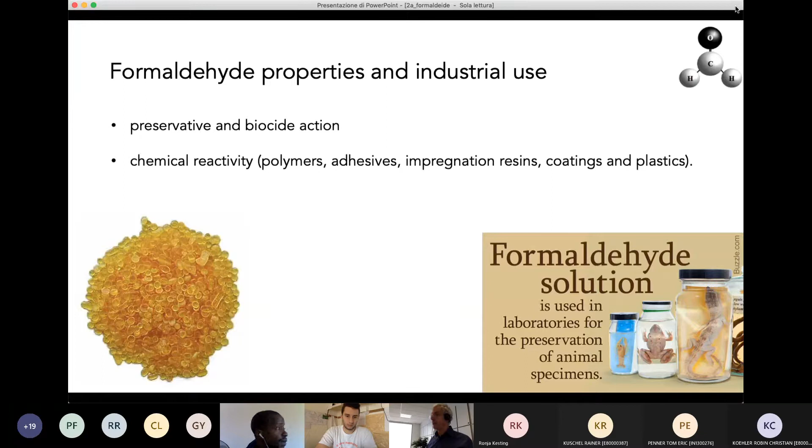We have learned what this substance is. It is a gas, very reactive, with very good biocide properties. So in many industrial sectors it is used, or it's better to say it was used a lot in the past because of its preservative and biocide function. And it was used, and is still used today, in the preparation of many chemicals, many polymers in particular, because, as we said, it's a reactive molecule.

So chemists like me like this substance because we can build more complex molecules starting from this little formaldehyde molecule. So these are the sectors where this substance is used: medicines, adhesives, preservatives, explosives, dyes, and many others.

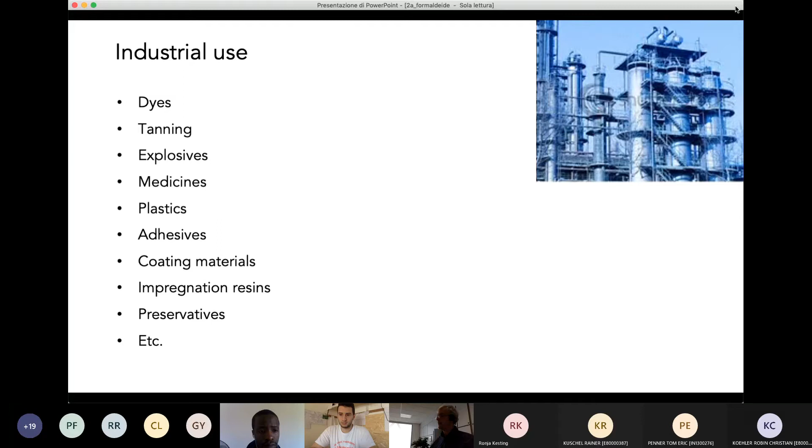We have understood also that formaldehyde is present more or less everywhere in the air we breathe, and we have also considered that this substance is really present in very small concentration in the air, but we breathe a lot of air during our daily life, and so also a little concentration, but continuously introduced in our body, can produce some disease, some problems, some health effects on our organism.

So the fact, the evidence, that formaldehyde is toxic, is irritant, but moreover is carcinogenic for sure, is clearly evidence that the emission, the presence of formaldehyde in our houses, in the environment where we live, is a serious problem for all of us.

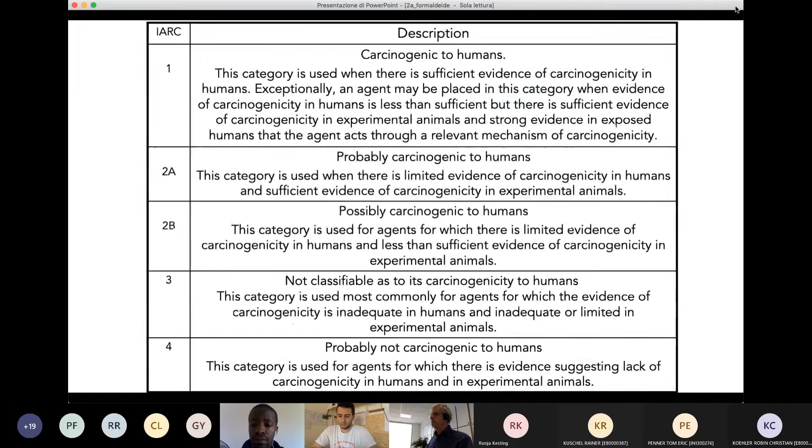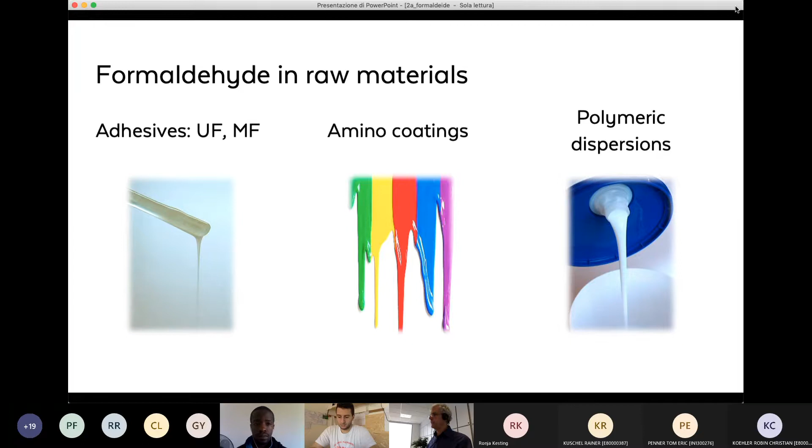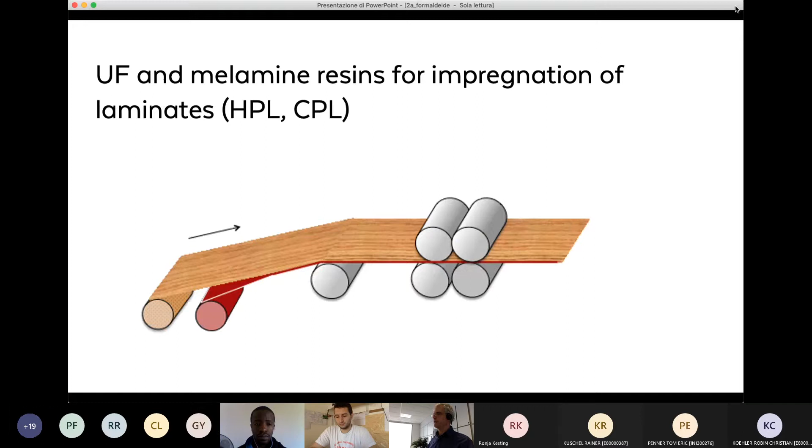We know now that formaldehyde is used also in the furniture sector for the production of different types of products: adhesives, coatings, polymer dispersions, as impregnation in the production of impregnated papers, of laminates. But the most important sector where formaldehyde is used is that of the production of wood-based panels.

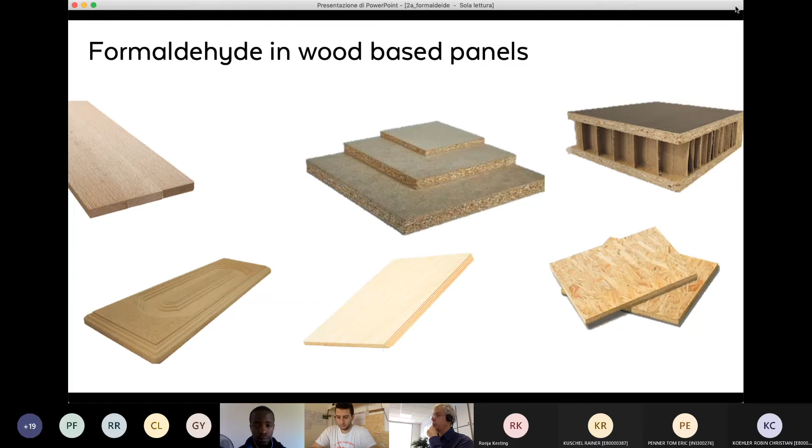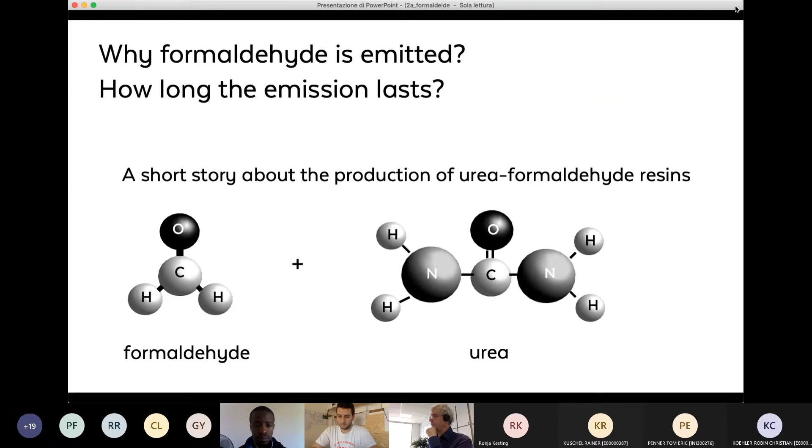All panels we have already analyzed are based on wood, of course, in different forms, and a binder, which is normally a urea formaldehyde resin. We know now that urea formaldehyde resins are produced starting from two substances, formaldehyde and urea. They are mixed together with some catalyst, with the contribution of temperature and pressure.

And the result of the reaction is the polymerization of these two substances. So they produce a polymer that is used for the production of wood-based panels.

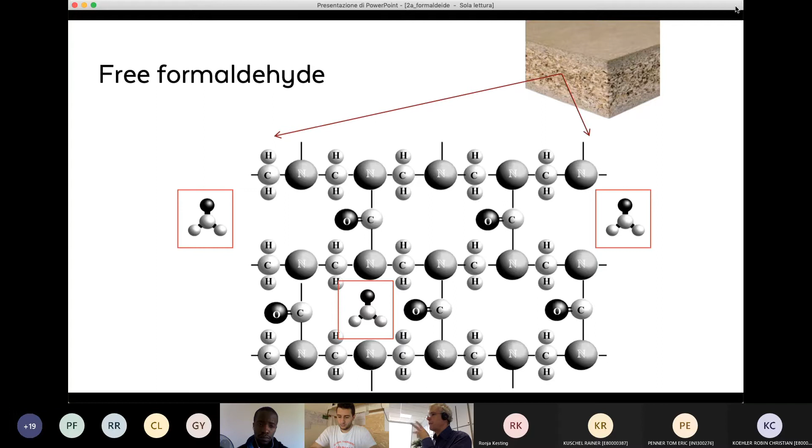There are two problems we said related with formaldehyde. The first is that not all the formaldehyde which was inserted inside the reactor reacts with urea. So some formaldehyde molecules remain as free molecules inside the resin.

But the most serious problem is the hydrolysis of the resin. This means the rupture, the breakage of the resin molecule induced by water, and water we know is present in the air of our houses. So these water molecules can react with the resin which is present inside the panel, producing this cut of the chain, and the byproduct is formaldehyde.

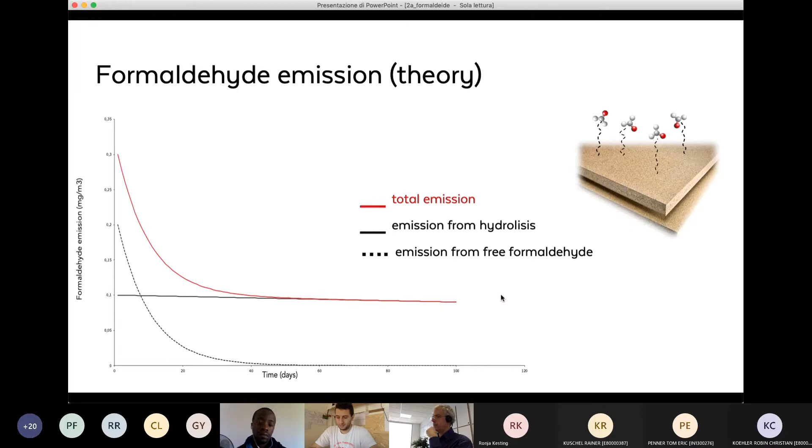But the hydrolysis, we said, continues for all the life of the panel, with a little decay over time. But this curve tells us that the formaldehyde emission is a never-ending story. It's continuous for all the life of the panel and of the derived product like furniture.

This is a typical example of an analysis carried out for this formaldehyde emission. You see here that after around 400 days, the emission is more or less constant.

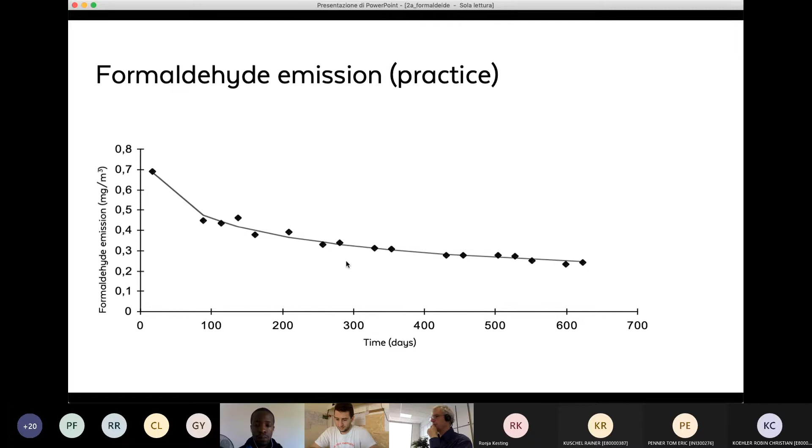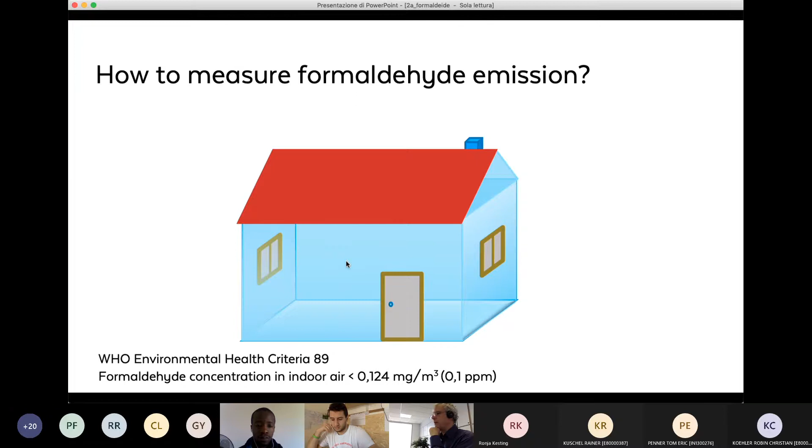How can formaldehyde be measured? We started — when I say we, it means the international organizations which deal with such subjects — we have considered the limit suggested by the World Health Organization in 1989, and we have decided to measure formaldehyde emission by producing a little house in our laboratory.

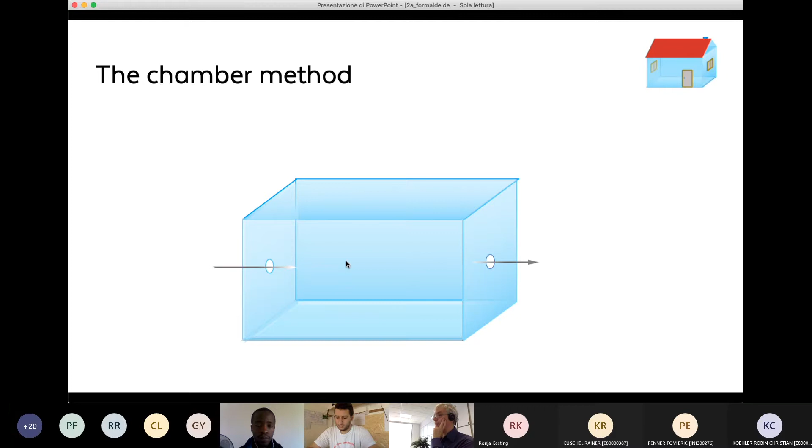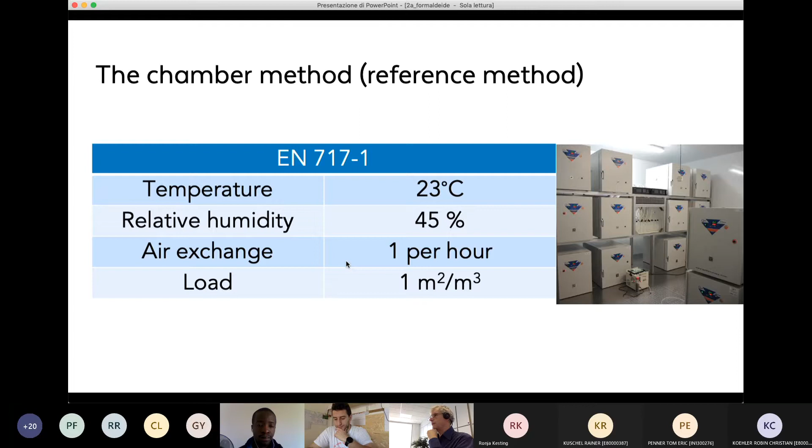So we have in our laboratories such chambers which reproduce the conditions of a real house, with certain temperature, certain relative humidity, with a certain air exchange, and with a certain load, which more or less reproduces what we normally have inside our houses. So what we measure here inside the chambers is more or less the same value that we can measure inside our houses.

I've added that there are also other test methods which are quick and cheap, because especially the furniture manufacturers or the wood-based panel manufacturers need fast and cheap methods to control their production.

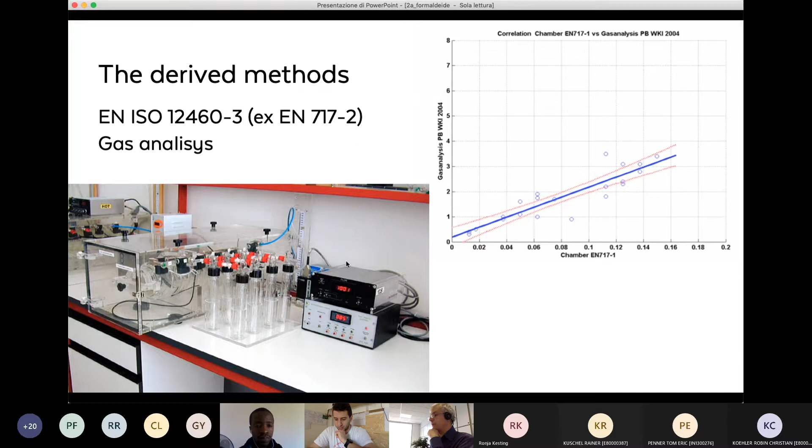Today, if you visit the producers of wood-based panels, if you can visit a plant, there is in all cases a laboratory like this, where they test continuously the formaldehyde emission of their products. Very often the laboratory is working 24 hours per day, because they need continuously to check their production.

So this is to check and to adjust, because they carry out the test, and according to the results, sometimes they have to change the parameters of the production in order to reduce the emission. So formaldehyde control is something which is carried out continuously in all factories producing wood-based panels.

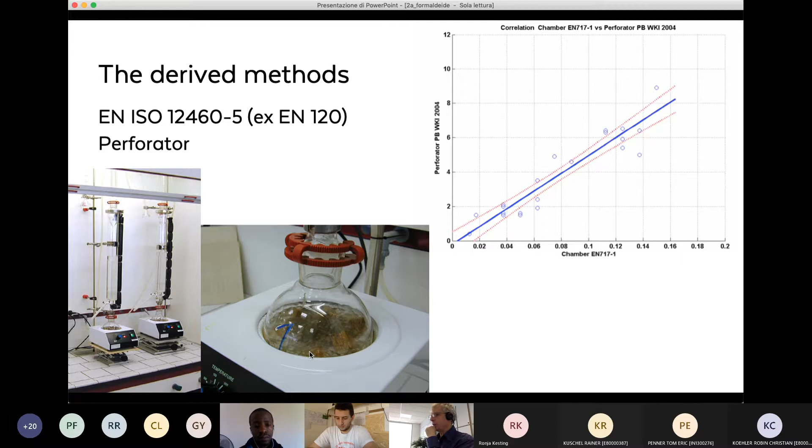Which are the limits? As I said, the limit for the chamber is the same limit that was established, that was suggested by the World Health Organization. So it's 0.124 milligram per cubic meter of air. And in Europe, such panels are called E1.

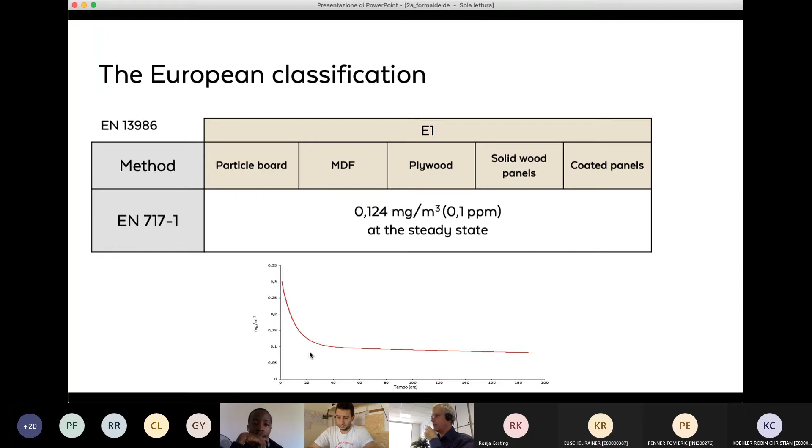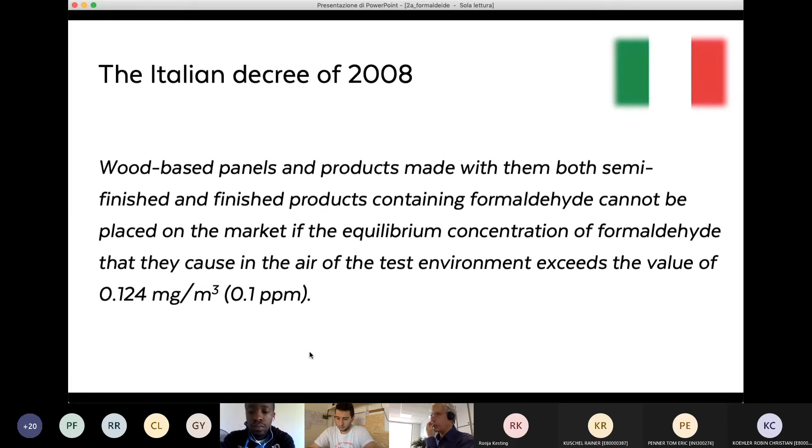There is a standard which defines whatever I already said, but what is important is that in many countries in Europe, this class is mandatory by law. For example, in Italy, but there are other countries: Denmark, Sweden, Norway, Austria, Croatia. There are many countries where this limit, this E1 class, is established by law. In Italy, this decree has been in force since 2008.

I've mentioned that last year there was important news from Germany. In practice, they have reduced the limit by 50%. In practice, the limit is the same in their new law, but the results of the test must be multiplied by a factor of 2. So it's like saying that the limit is exactly half of what it was before.

This change, this variation of the German law, is a consequence of some studies carried out by the experts of this country, who considered that today our houses are smaller. The air exchange is reduced because of energy saving. And so the values defined 30 years ago for the chamber method, they said, are not valid today.

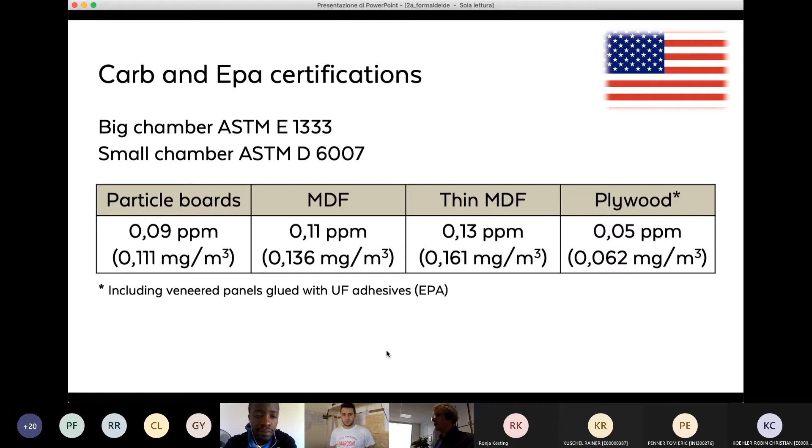This complicates the analysis even more, because you have to use a different method than the European one, and also the limits depend on the type of panel you are analyzing.

The American scheme for the analysis of formaldehyde in wood-based panels is really strict, because all panel manufacturers that export their products to the United States must be controlled by a third-party certifier — meaning an external body — with audits to be done every three months. So it's a really strict system. We at CATAS are authorized by CARB and EPA to carry out such controls, and my colleagues are continuously involved in this activity, because as it's written here, every three months you have to go to the factory.

You have to check the process, if something has changed. You have to sample some panels and test them inside the lab. So also in terms of cost, the certification according to the American scheme costs around, I could say, 10,000 euros for one production every year. So it's a real problem for this sector.

And today this American scheme, because as I said it's the most strict, it is the scheme adopted by IKEA. I've mentioned, I think, many times this Swedish company — it's, I think, the leading company in furniture production in all countries of the world, apart from China. And so what IKEA decides has an immediate effect on all the furniture sector in every country. So today all the panels used for the production of IKEA furniture must be certified according to the American scheme.

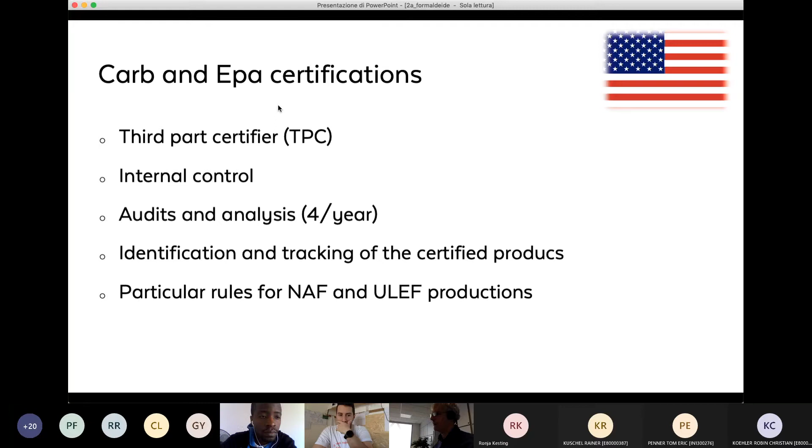And so you can imagine how dramatic this is in terms of activity for the wood-based panel producers, for the furniture manufacturers, and also for laboratories like us. There is a lot of work to do continuously, and a lot of visits inside the companies. So it's really a system that is having a strong impact in the furniture sector, and the reason is the one I've already mentioned: it is the scheme defined by the United States, but also the scheme adopted by IKEA, and IKEA today is a leading company of our sector. What they decide has a strong impact in all countries, in all furniture manufacturers, and so on.

There is also a law in Japan. They have another type of chamber, another complication, or a more simple method called the desiccator. They have divided the panels in 4 classes.

It's a standard which is valid not for furniture but for buildings. In the standard they say that if your panel is classified as F4 stars, which is the best, you can use the amount you want inside every environment. There are no limitations. If the panels are classified F3 stars or F2 stars, you can use them, but you have a limitation according to the volume of the environment where such panels will be placed.

So if you want to use F3 stars panels as ceiling, for example, you have to calculate the surface of the panel, the volume of the room, and there are limits for this ratio. F1 stars are banned. You cannot use F1 star panels in Japan. So these are the main laws that presently we have to deal with.

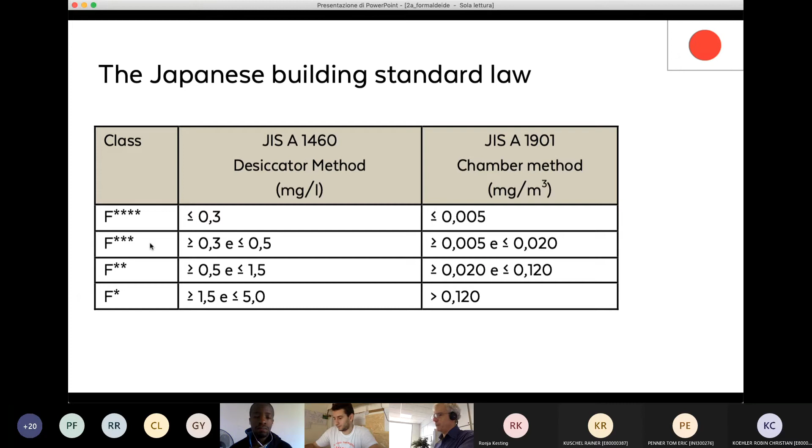But as you now know, wood-based panels are used for every type of furniture, so every company in the furniture sector is involved in this subject of formaldehyde emission, and they have to deal with these different laws, with these different test methods, and so on. So it's a complex subject. These are some comparisons.

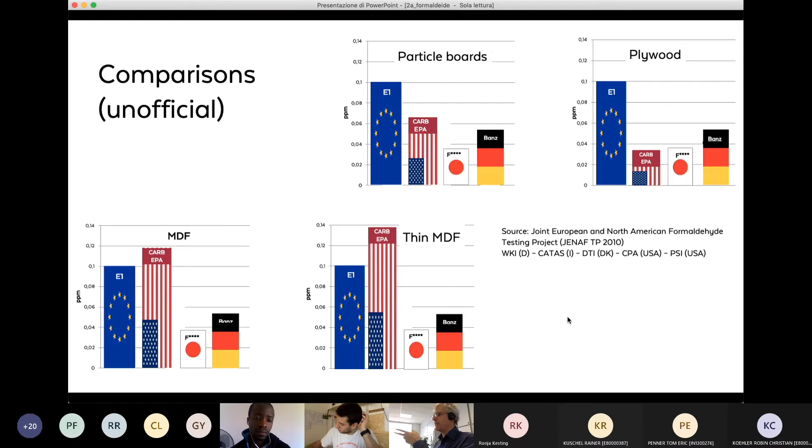You could say, okay, let's use one type of panel which is good for every country, but you see that, for example, for particle board, the Japanese F four star is the lowest value. For the rest, the German are half of the E1 class. They are a little bit lower than the American. If we go to plywood, the situation is different, and it's different again for MDF or for thin MDF. So it's not easy to deal with such a subject because of the reasons I have already mentioned, and because of the evidence you have here about the comparisons of the limits.

In France, they have a decree for all building materials. They consider the quality of the air inside houses, and every building material must be classified according to this label. Class A plus is the best, and class C is the worst. So if you go in France and buy any paint, for example, for walls or flooring, or whatever material which can be used for the construction of a house, it must be labeled according to this scheme, which contains also formaldehyde as a reference substance.

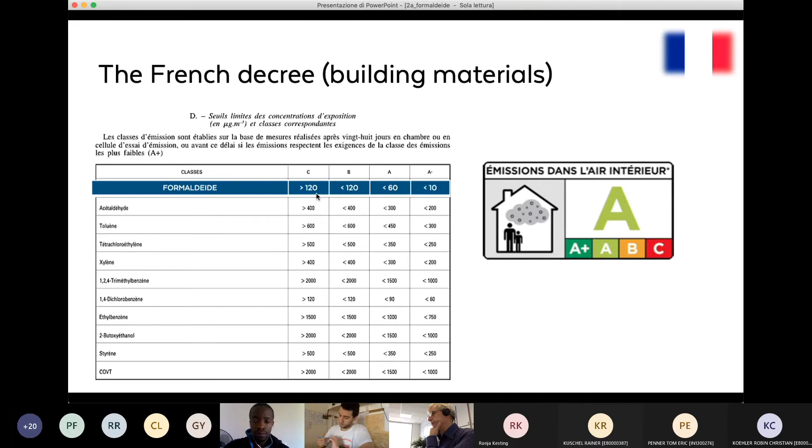There are also others, like toluene, xylene, and other solvents. But also formaldehyde is considered. Some months ago, I went to a shop here in Udine, and I found some products with such labels you see here. So it's something maybe you can find also in your countries. So this is evidence of the growing importance of the emissions, not only of formaldehyde, but emissions of all the volatile organic substances in the air of our houses.

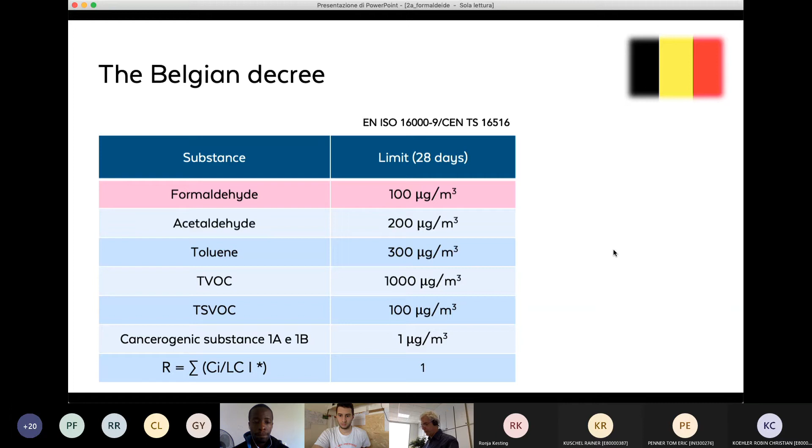In the near future, maybe we will have a label like this one, a European label, again for all building materials, and formaldehyde will for sure be considered. The CE marking of building products, which is mandatory in Europe — I think in the next 2-3 years, or 5 years, it will also contain such a label, which will inform the population about the safety of building products in terms of emission of volatile substances.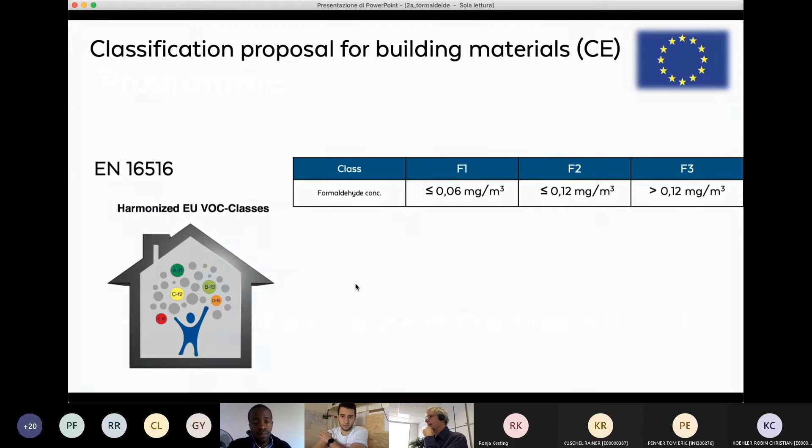This is a subject that must be considered, it's a part of our future. The quality of the air we breathe is something growing in importance, and not only the furniture sector, not only the building sector, have to face this new important requirement of the safety of the air we breathe inside houses, schools, universities, restaurants, and so on. The last part is dedicated to the possible reduction of formaldehyde emission.

What are the possible strategies? The first is very simple. The most simple option is to reduce the amount of adhesive inside the panel.

It's very easy in principle. The problem is that if you reduce the amount of the adhesive, you reduce consequently also some of the properties of the panel. In particular, the mechanical property, the internal cohesion can be strongly affected. So in principle it's right, but in practice it could produce serious problems to our panels.

Use of melamine formaldehyde adhesives or combination. Melamine, when it reacts with formaldehyde, produces chemical bonds which are more stable to hydrolysis than the same bonds produced with urea. So melamine formaldehyde resins are absolutely better than urea formaldehyde resins.

You could say, okay, you have found the solution. Why not substitute urea formaldehyde resin with melamine formaldehyde resins? The answer is that melamine formaldehyde resins cost around 5 times more than urea formaldehyde resin.

So also in this case, in principle, we can substitute urea formaldehyde resins with melamine formaldehyde resin, but the cost of the panel, the cost of the finished product, will increase a lot, and so it's something that is not so easy to be adopted. I forgot to write here that there are other types of resins that we can use.

For example, today there are many experiments, but also applications of resins derived from vegetables, especially from soy seeds, which seem to be good, not only in terms of performance, but also in terms of costs.

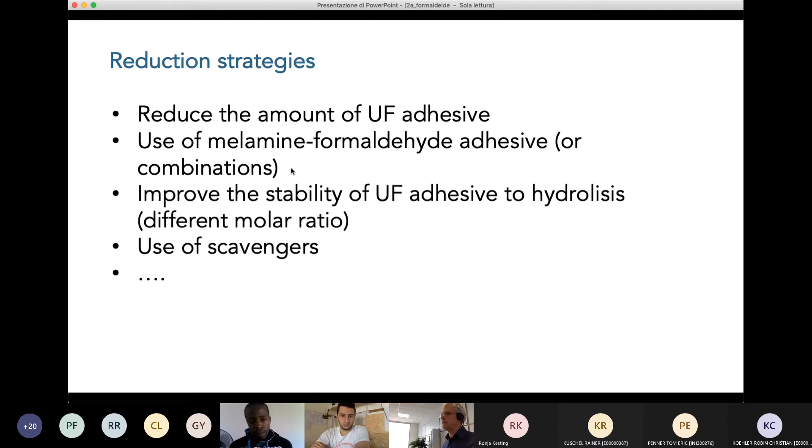So you don't affect the glue, you don't affect the mechanical properties of the panel. You simply add something which reacts with formaldehyde, so it prevents the emission of this substance. I think that's all for this part.

Let's hope that such substance did not create problems to our body. Some people could be more sensitive to such substance, and maybe if some of you is allergic, has some problems with such type of disease, it's something you could consider, because apart from the carcinogenic effect, it's irritant. So if you are particularly sensitive, your body could react to the assumption of formaldehyde with bad effects for you. I think this is all for this part.

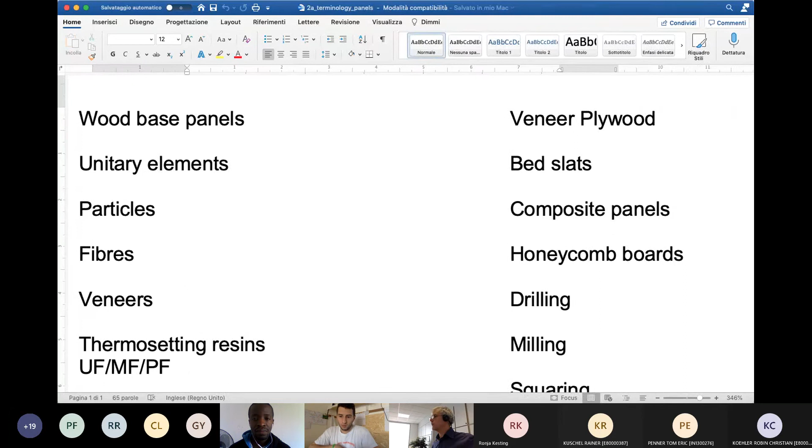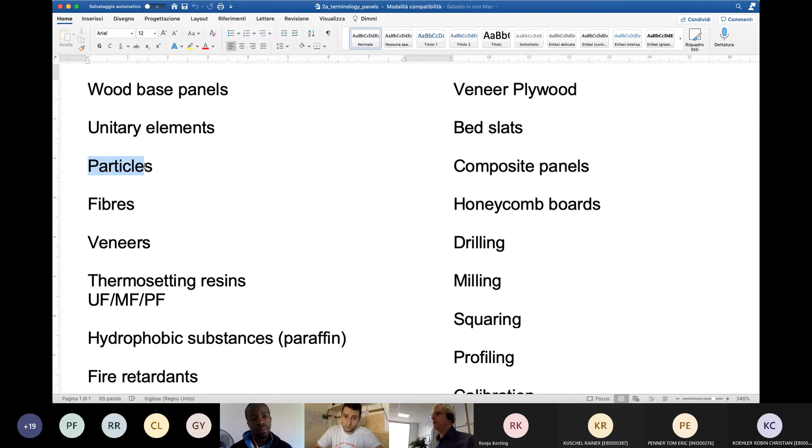So I've listed here the terms we have used for this second subject, wood-based panels. I would like just to read them and clarify what is their meaning. Wood-based panels are panels produced with wood. Unitary elements are the elements which form the panel: we could have particles for particle boards, fibers for fiber boards, veneers.

Veneers, remember, are thin sheets of wood, thin foils, which thickness in the case of plywood is normally around 1-2 millimeters.

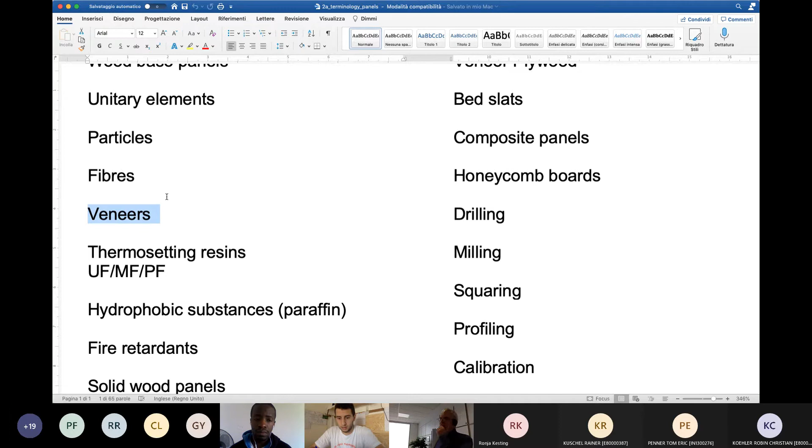Then we said that in the second step we use the thermosetting resins. Thermosetting means that they set in consequence of heating, meaning that they harden, they become solid in consequence of heating. This is a big difference from the thermoplastic resins.

We will consider later on more in detail the differences between thermoplastic and thermosetting, but to give you a general idea, I would like to remember that thermoplastic, a term we've used for lignin, is a polymer which becomes soft in consequence of heating. Thermosetting, on the opposite, are polymers which become more hard in consequence of heating. So the behavior is exactly the opposite: thermoplastic becomes soft when heated, thermosetting becomes hard when heated.

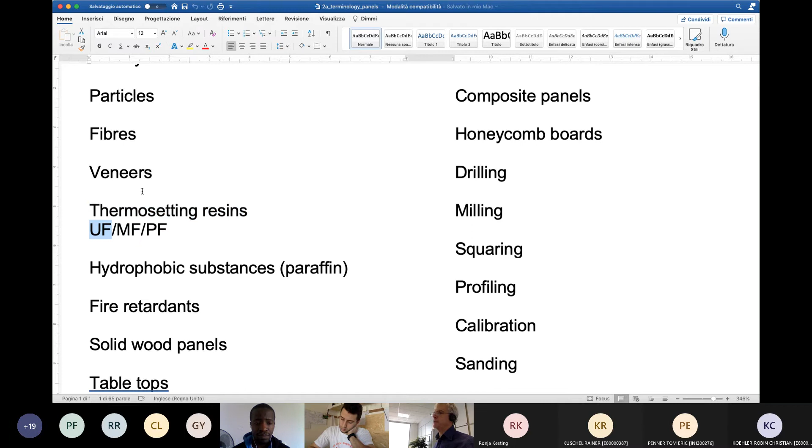The main resins used for the production of wood-based panels are those known as urea formaldehyde, which are the two monomers used for the preparation of the polymer, and melamine formaldehyde. We have already said that melamine formaldehyde is absolutely better in terms of performance, in particular the resistance to hydrolysis is higher, but the cost of melamine formaldehyde resin is 4 or 5 times more than urea formaldehyde resins.

In consequence of the evidence that melamine formaldehyde resins are resistant to hydrolysis, this type of resin can be used for panels, especially solid wood panels or plywood to be used outdoor. You cannot use outdoor panels produced with urea formaldehyde resin because of the problem of hydrolysis - they are destroyed by water. Melamine formaldehyde resins are more resistant to hydrolysis, and so this is the reason why, from one side, they emit less formaldehyde, and from the other, they are suitable also for outdoor environments.

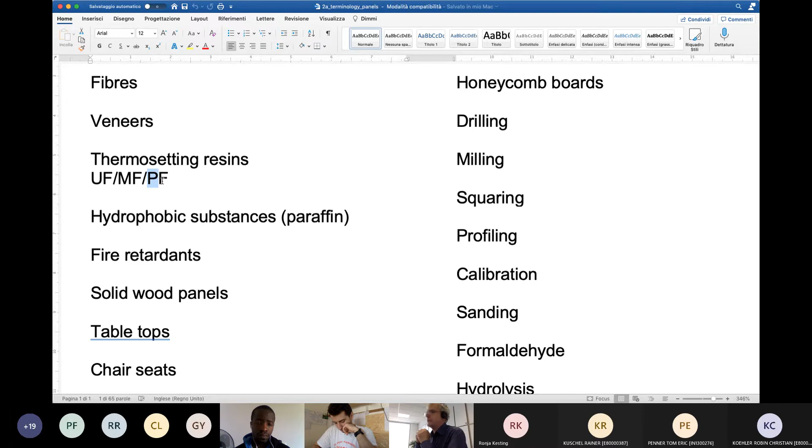Phenol formaldehyde, also in this case, the performance is very good, also outdoors. The problem of phenol formaldehyde resins is that phenol is again a dangerous substance, and the other problem is that the bonding line is dark, brown reddish, so the panels produced with such resin present this dark color in the bonding line. Apart from this, phenol is a serious dangerous chemical, and so they are used for certain types of panels, in particular for plywood to be used outdoors, but the use is really limited.

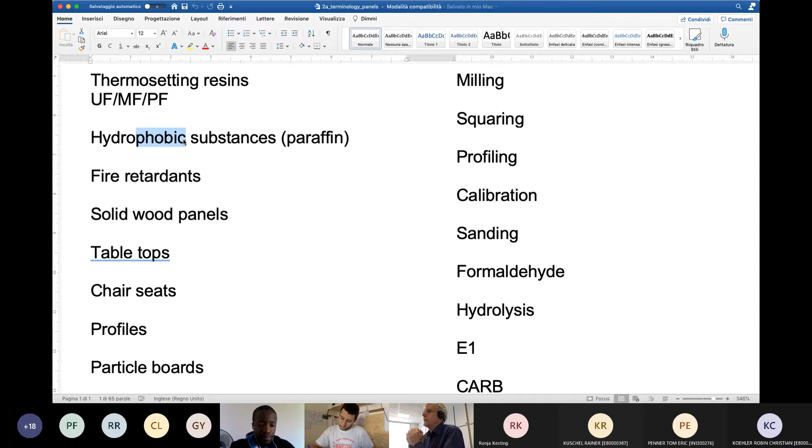We mentioned the possible additives to be added in the production of wood-based panels. We mentioned hydrophobic substances like paraffins. Hydrophobic - hydro means water, and phobic means fear, dread - so they don't like water, this is more or less the meaning. These are substances added to certain type of panels to protect them from water. So you can find particle boards that are sometimes called hydro particle boards. In any case, they are classified according to certain standards, and such panels contain paraffin to reduce the effects derived from contact with water. The use of such panels is recommended, for example, for kitchens, for bathrooms, for environments where humidity or water is normally present.

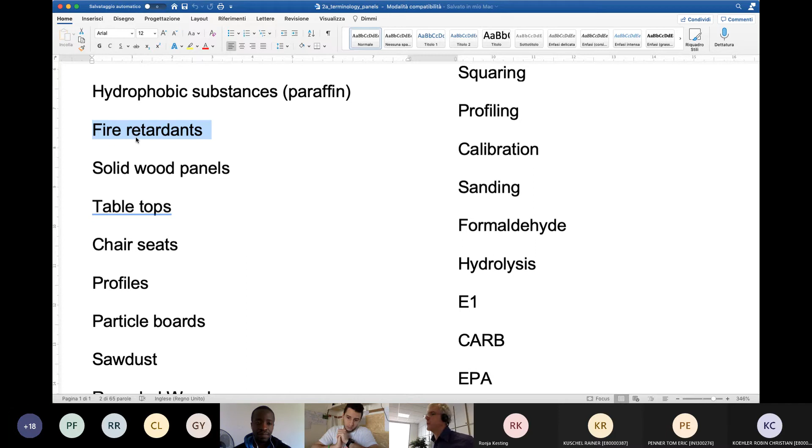We mentioned also fire retardants. We can add such substances to wood-based panels for certain applications where we need to reduce the fire sensitivity of wood-based panels. So in Italy, there are laws for public environments like theaters, restaurants, hotels. In those cases, the use of wood-based panels containing such retardants is mandatory. The laws on fire resistance are different in every country. Also in Europe, in principle we are in the European Union, but in many cases the laws, especially those related with safety, are different, and so there are not common rules in Europe or anywhere in the world for fire safety in buildings.

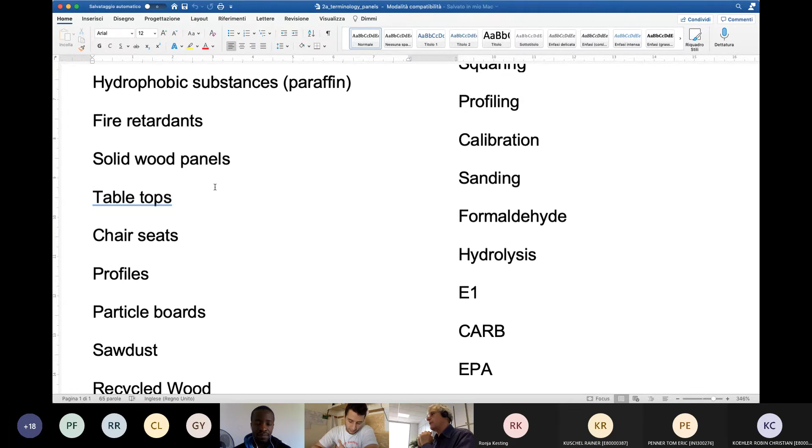We mentioned solid wood panels, which are produced with little solid wood elements bonded together to produce wide panels, thick panels, or very long panels. They are used mainly in the building sector, but there are some applications also for furniture production. We mentioned tabletops, chair seats, or profiles, which are long and narrow elements used for different purposes.

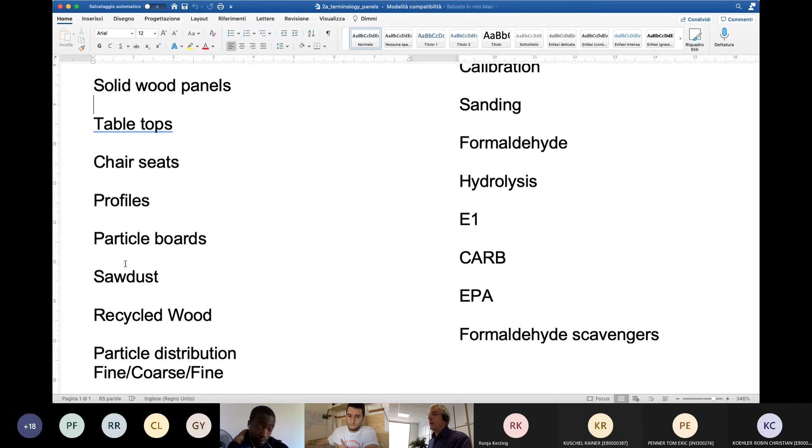Then we analyzed the different types of panels, like particle boards, so boards or panels produced with particles. We said that it's possible to use different types of wood sources, not only trunks, but also sawdust deriving from other woodworkings. The residues of other woodworkings can be used for the production of particle boards.

But we can use also what we called recycled wood. Last time we have also seen a video where recycled wood was used for the production of particle boards.

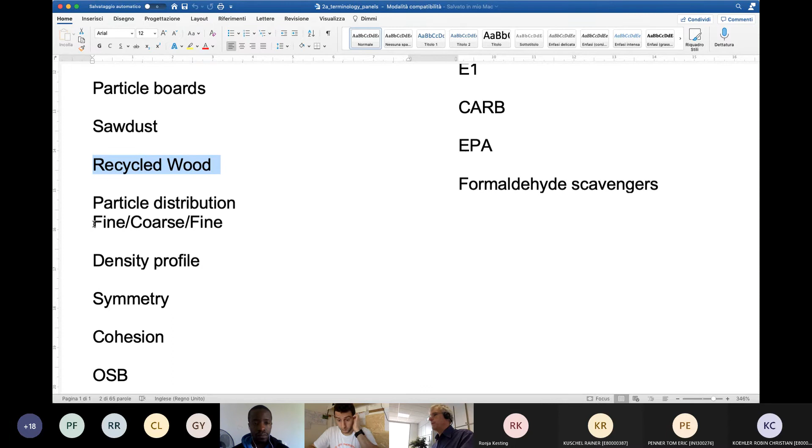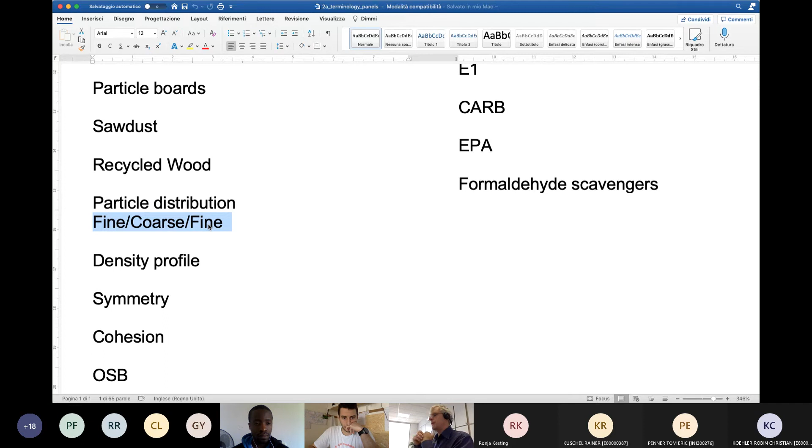The distribution of the particles inside particle boards is not homogeneous. Normally there are three layers: the fine particles on the external layers, and the coarse in the internal part. I don't want to repeat why we have this distribution, I think I've already mentioned it more than once.

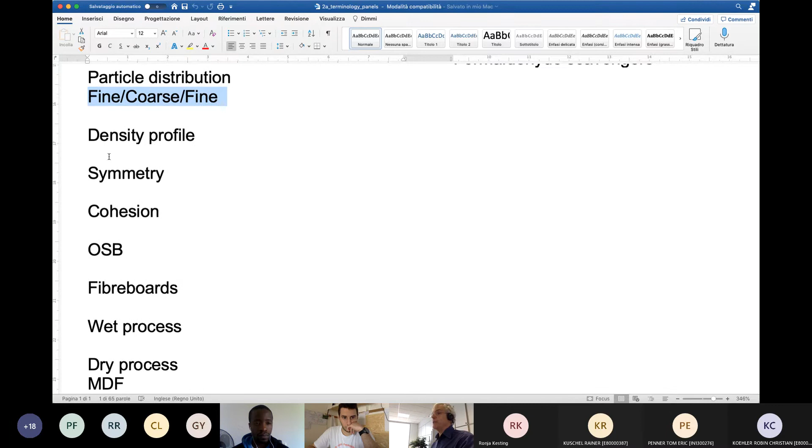For this reason, the density profile is, I think I've said, like a sort of identity card of the panel, because many of the properties of the final product depend on the density profile, especially the mechanical properties. And very often the panel producers continuously measure the density profile in the production line.

So they have a special system using X-rays which are able to measure the density profile after the pressing, and so they can continuously adjust, for example, the amount of the three types of particles. They can adjust the pressure. So it's a fundamental property of the panels.

And what we said, it's also important the symmetry of the density profile, because if the density profile is not symmetric, so for example if one of these two layers is lower than the other, the panel could bend in use, creating a serious problem to the final product.

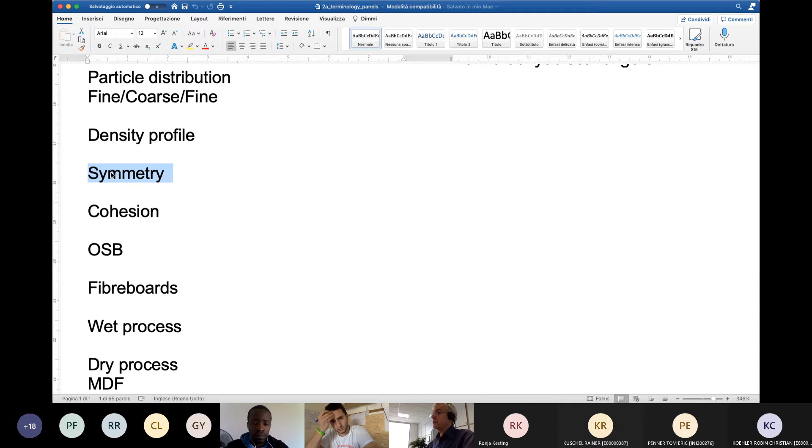It's quite frequent the case where the doors of big wardrobes cannot close, but also this happens for the little doors of kitchens, for example, or bedrooms. So symmetry is fundamental for the good behavior of the finished product.

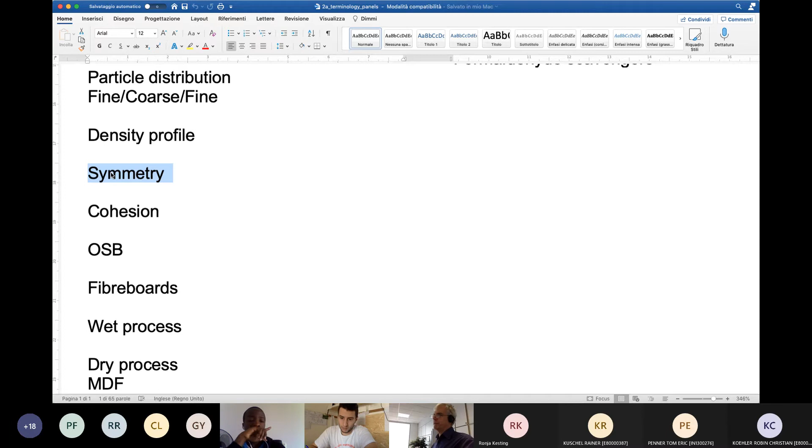The internal cohesion is also a determining factor for wood-based panels. We will say something more on cohesion when we analyze the adhesives. Cohesion is the internal force which bonds together the elements or molecules of one material. This is important, for example, for the screws that are inserted in the panel - the holding force of the screw strongly depends on the cohesion of the panel.

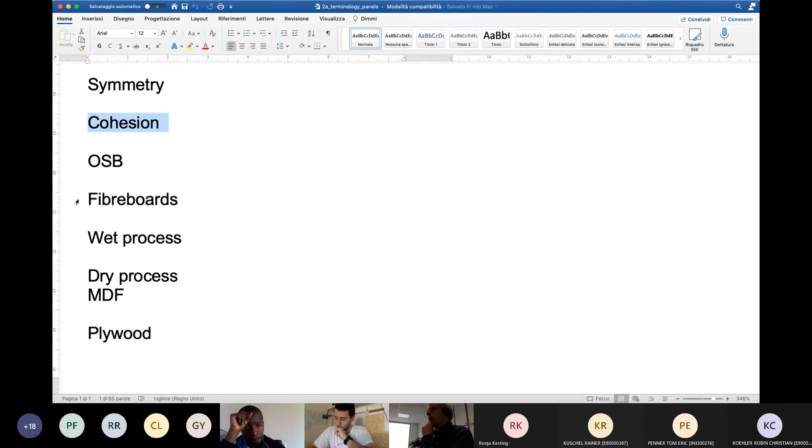Then we analyzed very quickly the oriented strand boards. It's a type of panel similar to particle boards, but in this case the particles are bigger. The typical application of such panels is the building sector, but we said that in some cases they are used also for the production of certain types of furniture.

Fiber boards are boards produced with fibers. The production process is similar to that of particle boards, but in this case initially there is another step after the chipping of the wood. This step is called defibration, so the wood cells are completely destroyed.

This happens in consequence of some chemicals, some particular procedures involving pressure, involving steam inside this particular reactor. So it's like a little explosion of the wood cells, which are reduced to small fibers, and then the fibers are assembled together to produce the fiber boards with two different processes.

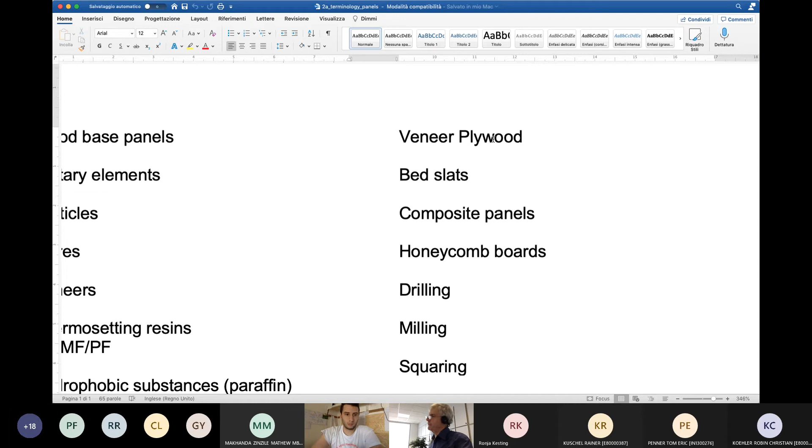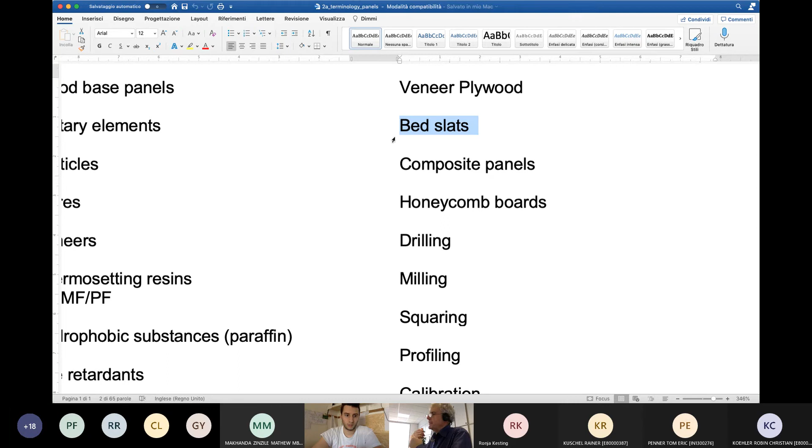In the case of veneer plywoods, the layers are veneers which are pressed together with the different layers placed in the opposite direction. This improves the mechanical properties of such panels and reduces the anisotropic behavior of wood. They are used, for example, for the production of bed slats, because one of the most important characteristics of such panels is the good mechanical resistance, even in the case they are produced in thin layers.

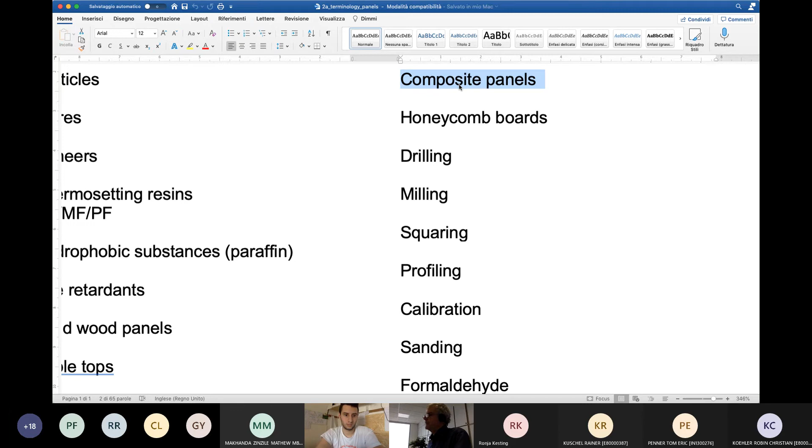Finally, we analyzed the composite panels, which are made of different types of materials assembled together. The most important type of composite panels are the honeycomb boards, which are made with 3 layers: 2 external covers made of particle boards or MDF, and the internal part, which is made of paper in the form of the honeycomb structure.

These are increasingly used in the furniture sector because the main property of such panels is lightweight, and I don't want to repeat myself, but lightweight is today one of the most important properties of furniture elements. The reason is because furniture are produced in one country and sold in another, so they travel a lot, and the weight means cost.

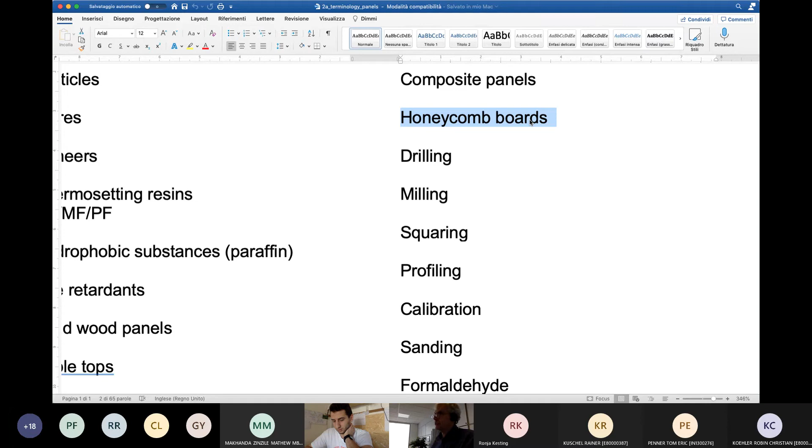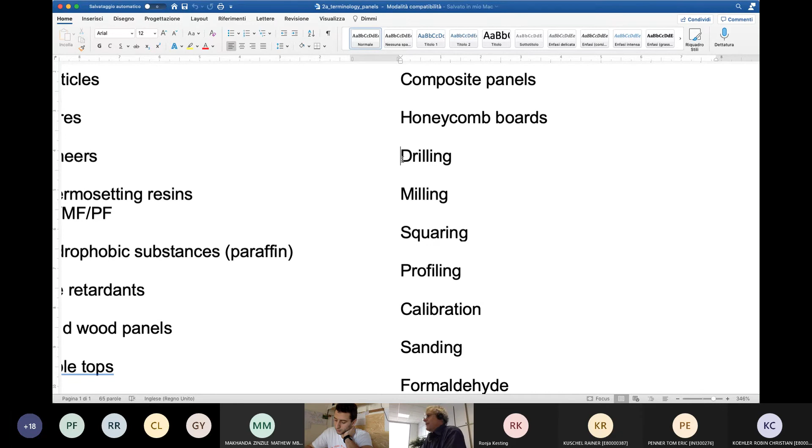So they try to design furniture in a way that all the container can be completely filled. No voids, because voids mean space that is paid for the transport but not used. So the two parameters they consider are the weight and the space. The dimensions of their furniture are studied according to the needs of the end users, according to the standards, but also considering the space of the containers where they are stored for transport. So this new target of the market is sometimes also interesting to know.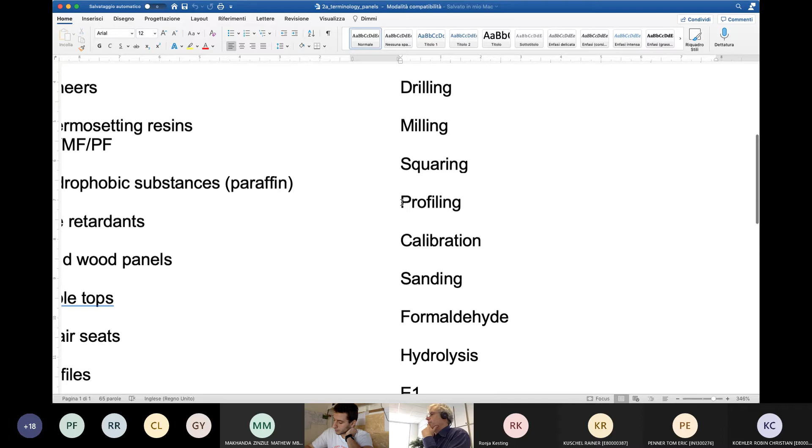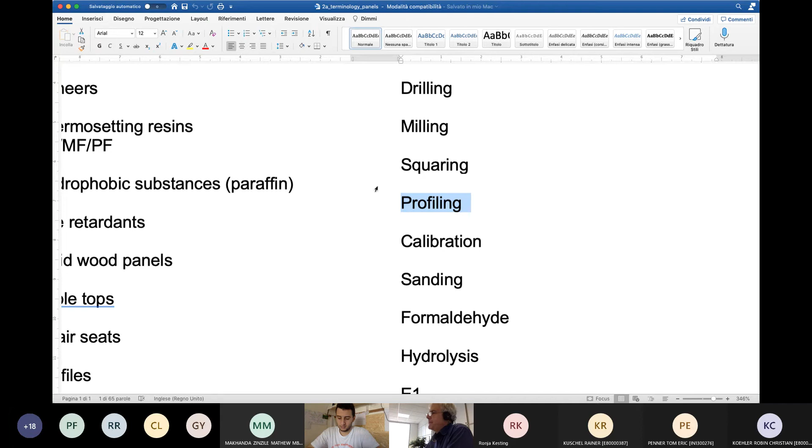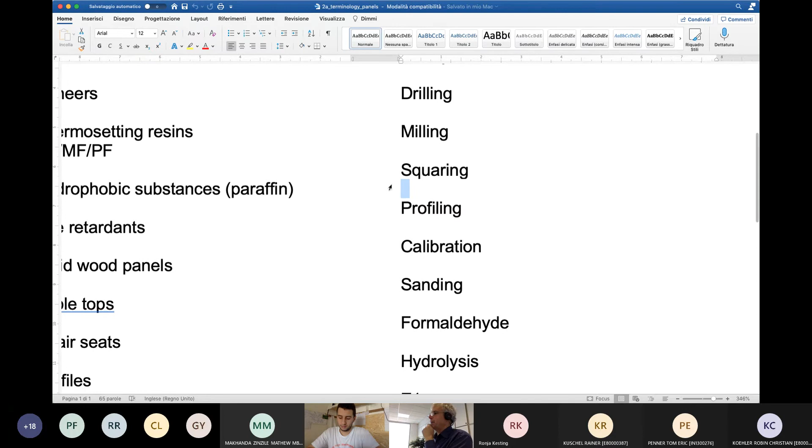Finally, we have very quickly analyzed the different types of woodworkings that are carried out on wood-based panels. Sometimes the furniture manufacturer buys wood-based panels that are already finished with the melamine paper, so they only need to cut the panel to size.

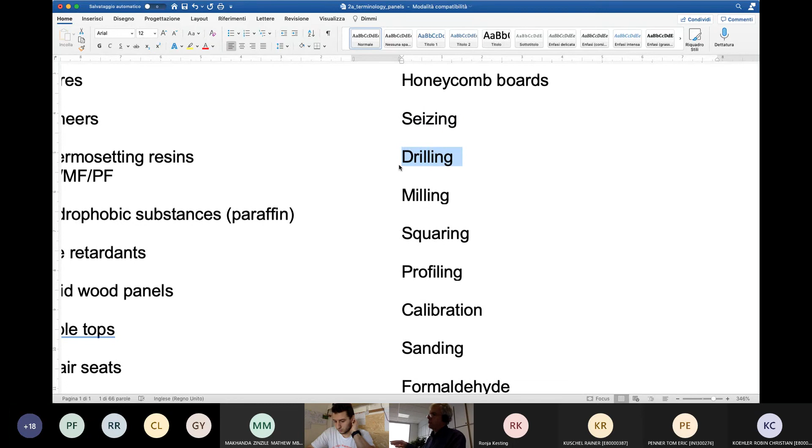So I forgot maybe to write: cut the panel, drill it to create the holes for the connection of the different parts, and we will see the closure of the edge. So in many factories, you can see only 3 machines: sizing, drilling, and the edge banding machines — the machines used for closing the lateral surfaces after the cut.

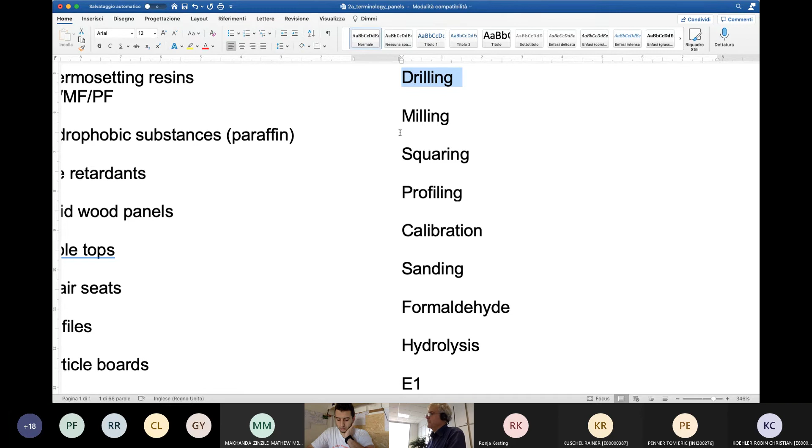The rest are more complex woodworkings that are used by specialized companies. A quick mention about the difference between calibration and sanding.

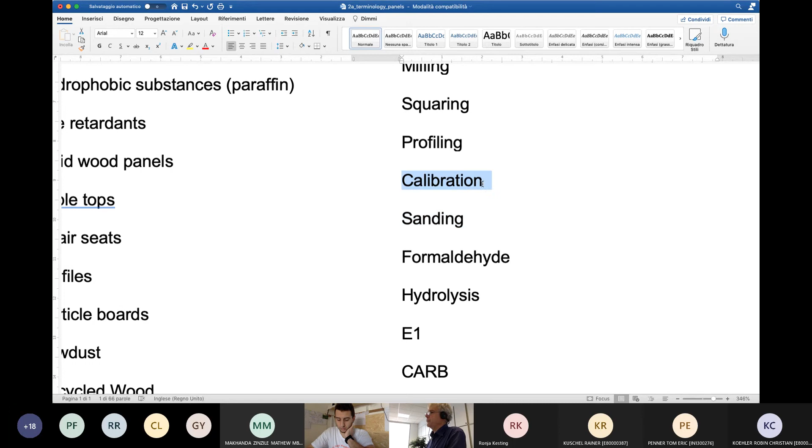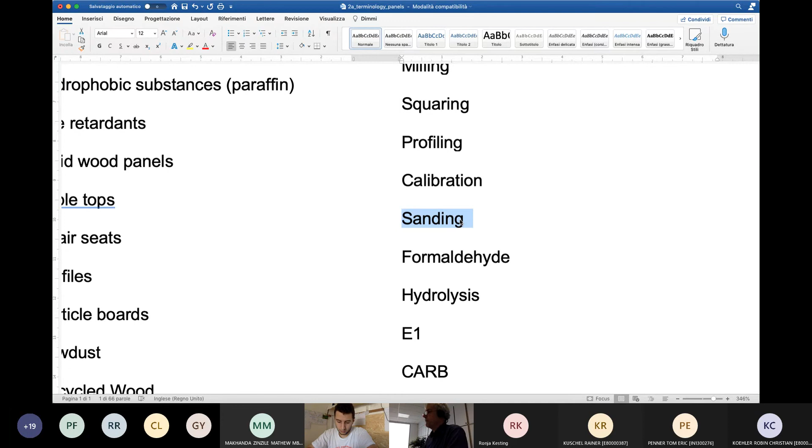In principle, the 2 woodworkings are carried out with the same machine. Calibration means reducing the thickness of the panel to the desired value, normally carried out by sanding belts. And sanding is similar, but the aim of sanding is to produce a flat and homogeneous surface for the following finishing operation. So calibration and sanding are in principle the same operation carried out with sanding belts, but the first one's aim is to reduce the thickness, while the second is to create a homogeneous and flat surface.

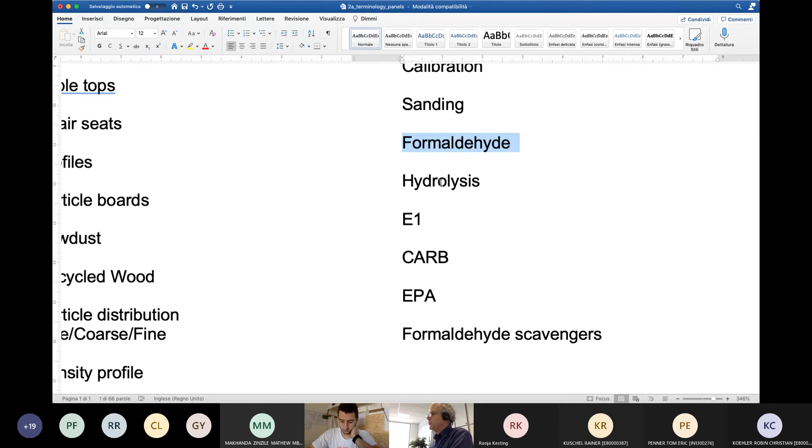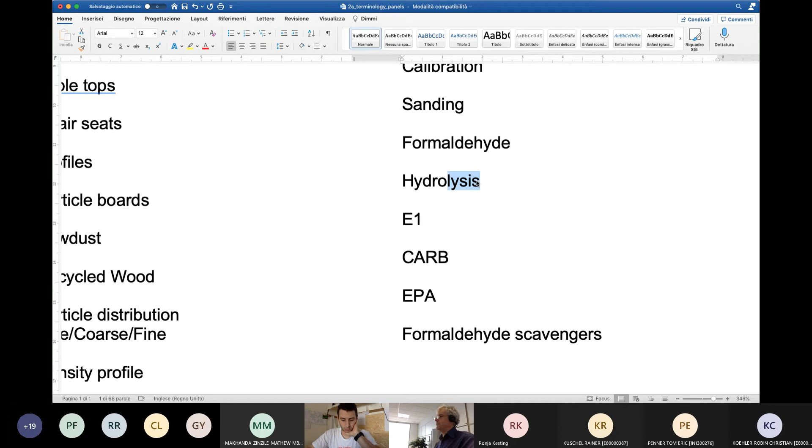Finally, today I think there is not much to say about such terms, because we have already repeated this morning. Formaldehyde, we know what this molecule is. Hydrolysis, I've already mentioned the meaning: hydro is water, and lysis is cut. So it's the cut of the bonds of the urea formaldehyde resin, which produces formaldehyde as a byproduct. Cut is not the proper term, it's the degradation, the chemical reaction — such terms are more scientific than 'cut'.

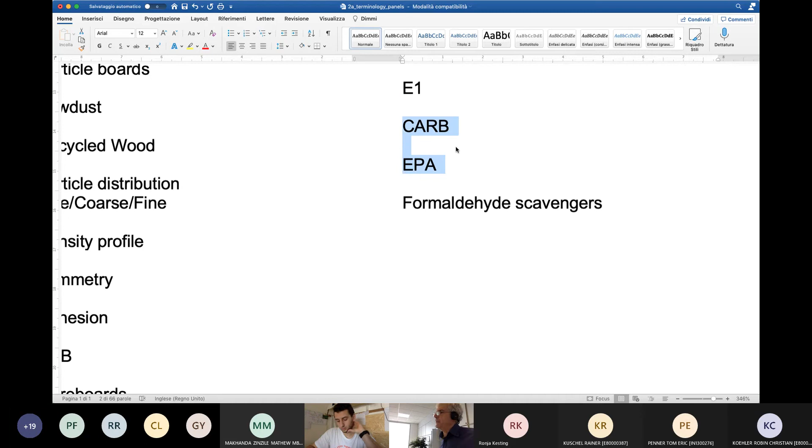E1 is the class defined by European standards for wood-based panels with reduced emission of formaldehyde, and the limit has been established according to the indication of the World Health Organization. CARB and EPA are American bodies: the first is the Californian Bureau, and the second is the Environmental Protection Agency, which have published specific laws in the United States for the control and limitation of formaldehyde emission from wood-based panels.

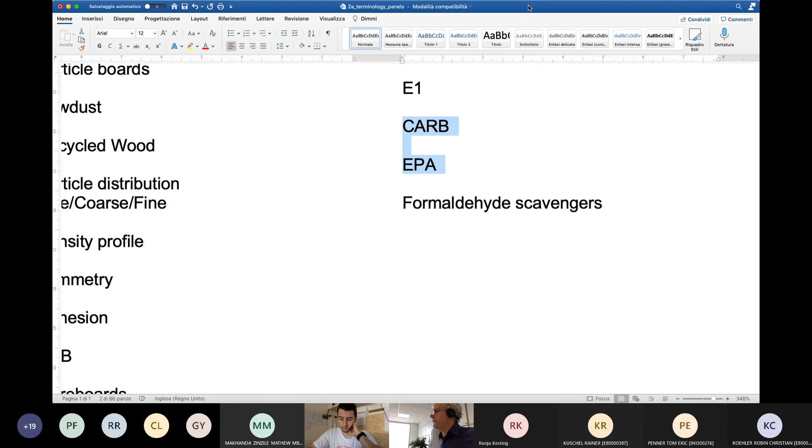So I don't want to repeat all the story we have already discussed today. And finally, this strange term, formaldehyde scavengers — but okay, this term I've also already told you the meaning of, and why scavengers are so important in the production of wood-based panels.